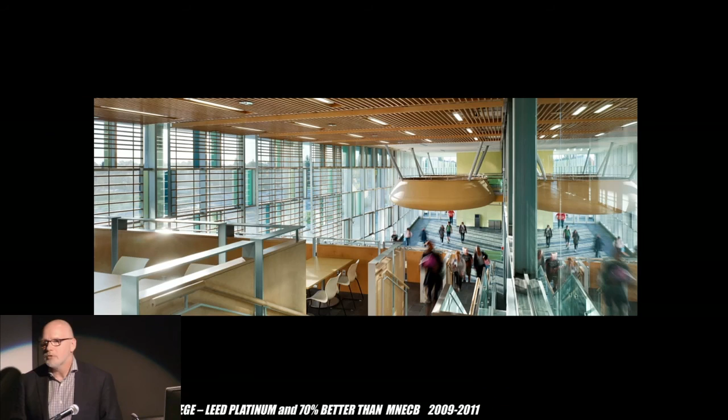In order to do that, it was built like a factory. Those are insulated metal sandwich panels on the exterior. On the interior, it's a dramatic student environment with about 10% of the total area, so 20,000 square feet of space made explicitly for shared learning. There are the sandwich panels and the solar shades—24 months from start to finish.

In this project, I had to believe that we could construct 40,000 square feet on top of an existing building—I'll show you more about this one in a few minutes—in 4 months, and innovate with timber construction in order to do so, and get these kinds of spaces on the interior when it was all done.

We'd never done a net zero building before. In this building, we had to believe that working with a construction manager and a very strong-minded client, we could achieve net zero on a very meager budget, and celebrate timber and student life, and places of repose for social learning in the building, and go through the iterations it takes to get to a net zero building. I'm definitely going to talk about that.

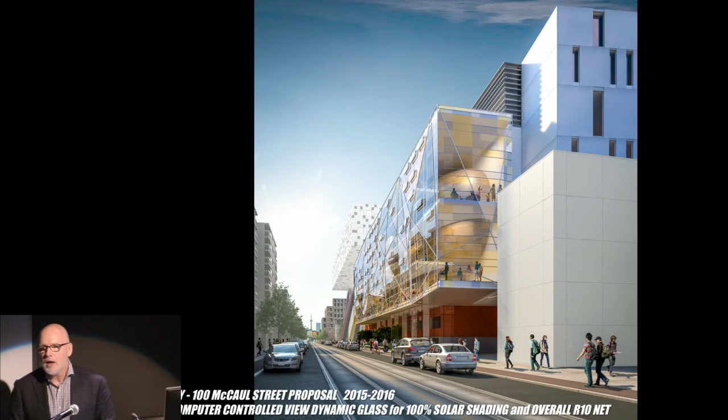In this building, we had to believe we could insulate every other piece of it—this is McCaul Street in downtown Toronto—so well that we could provide a great display for student life inside OCAD University and still be a net zero building. Okay.

Colleges and universities are constantly under pressure to innovate. As you know, the demographics across Canada at colleges and universities are changing rapidly, enrollments are changing rapidly, and the needs of students are evolving. What I've discovered, having worked both in the commercial and institutional sectors, is that they're committed to meaningful innovation.

They believe in design, and when a building's designed well, they know it—they can see it because they get more applications and have longer retention of their staff and students. They believe in design; it's quite remarkable. They also know that when student life is better, student outcomes are better. Very interesting that they fully believe that. Having worked in many colleges across Canada, I can tell you unconditionally that's the case.

So I want you to park that introduction for a second. And this is where my naive idealism comes in. I'm hoping that by the end of this you'll have memorized these 6 numbers and 1 letter, because I think this is going to be the shortest form of zoning bylaw for mid-rise that you will ever see. These are the 6 numbers, that's it. We're going to dispose of all the other paper you could possibly need—this is it. So we're going to save many trees.

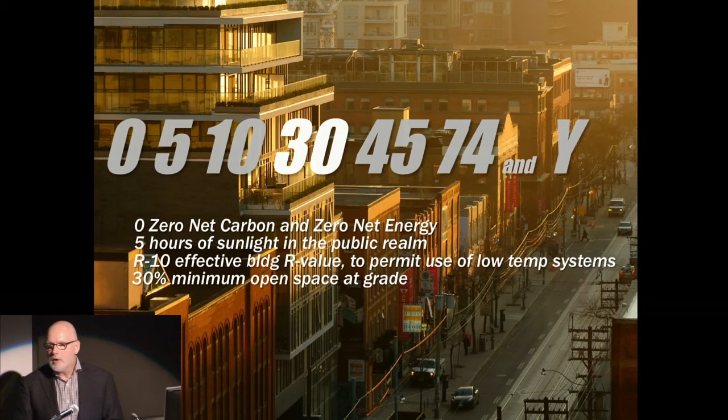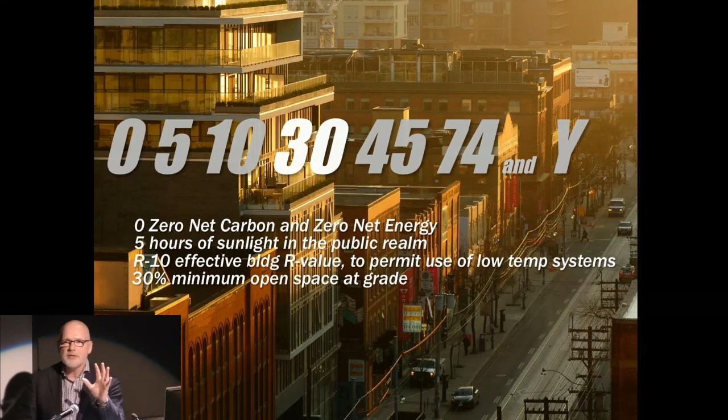30% minimum open space at grade. This is a pretty soft one, but that's because in most of the hyperdensity projects, there's very little—it never gets to 30%. What about setting a third of the site aside for open space at grade?

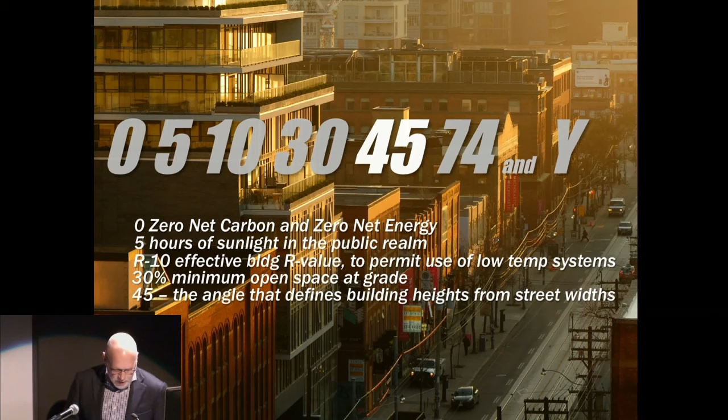45. If you've read the avenues and mid-rise guidelines, that is a number which seems like it's just something off your set square, an arbitrary number—45 degrees. But really, it's not an arbitrary geometric number. It's not an abstraction, but it's actually a latitude-specific sun angle that defines the relationship that your building will have to the public realm, to the street, and to your neighbors. It's not just a number.

And then 74. 74 is the energy use intensity of the building that I just described, which is a net 0 building. I don't know if anyone speaks energy use intensity—anyone bilingual? Nobody? Okay, well we'll get into that in a little bit. That's the energy consumption of a building. What it means is that it's a very efficient building.

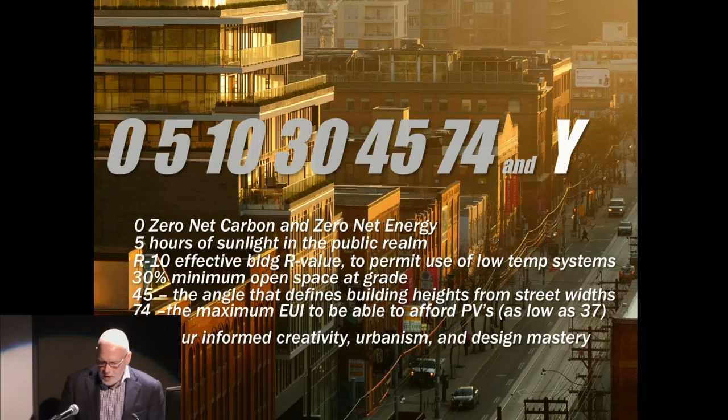And lastly, but not least importantly, when you know how to achieve the city livability we were talking about earlier, and you add these criteria, they're not going to replace all the things that were so eloquently discussed this morning. But when you add these criteria as self-evident underpinnings of your work, then you'll have informed creativity, and you will use your own sense of urbanism and the urbanism you're learning as you make your way through cities here and around the world, along with your design mastery, and you'll make your buildings better.

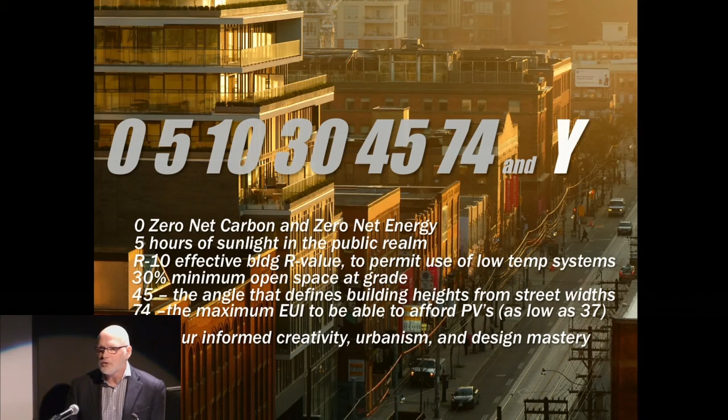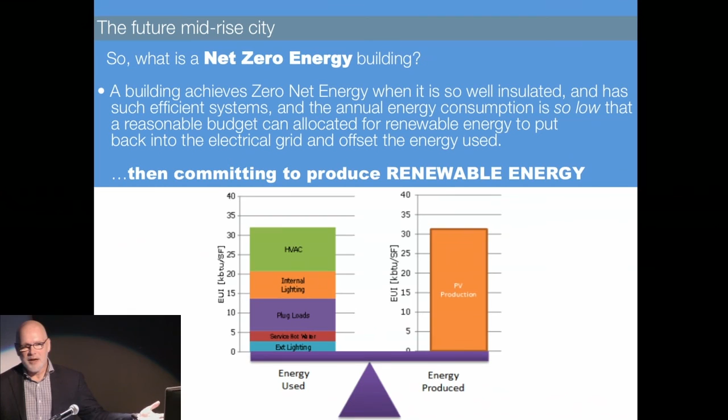Let's talk about zero for a second. What is a net zero energy, or zero net energy building? It's a building where you've made it so efficient that it consumes so little energy that you can, at a certain point, afford to buy enough PV to balance that energy. So you've got very little consumption, you create energy, and you put the two together—the building is a net zero building.

There's another way of looking at it: energy use intensity. Energy use intensity is the energy use of your building in kilowatt hours per square meter per year. You've probably learned about that.

And getting it low is going to be all of our targets, because we all need to be net zero by the year 2030, given provincial and federal aspirations, soon to be guidelines. Let's go about 5.

The Mid-Rise and Avenues guidelines suggest a minimum of 5 hours of sunlight in the public realm per day between the equinoxes. If you get 7 hours, you can have a typical lawn and a wonderful park. Between 4 and 7 hours, you start having to deal with shade-tolerant plants. Under 4 hours, the plants won't survive, or they'll need a lot of help — very limited planting.

So that's just one aspect of why it's important to have that 5 hours of daylight. I'm sure you've seen the plugins for SketchUp, and maybe Revit as well, for this transition from shadow mapping to daylight mapping. What an interesting change, to think about not the shadows, not the negative, but the positive — that the sunlight is the important thing. It's such a significant issue that it's in the Mid-Rise and Avenues guidelines: at least 5 hours of sunlight from spring through fall.

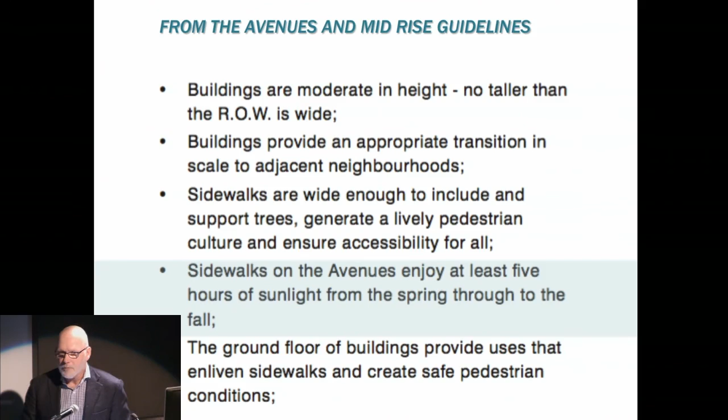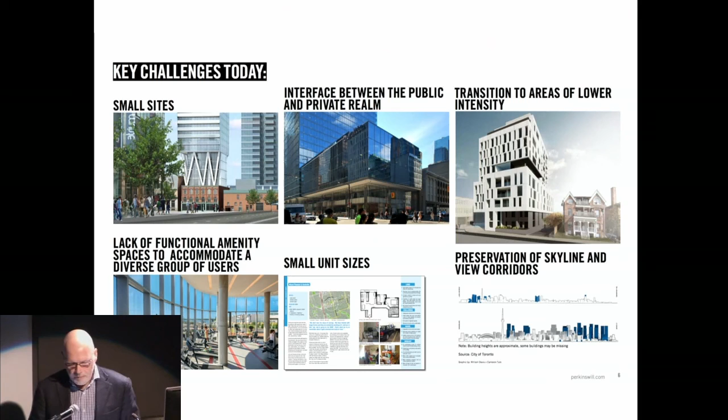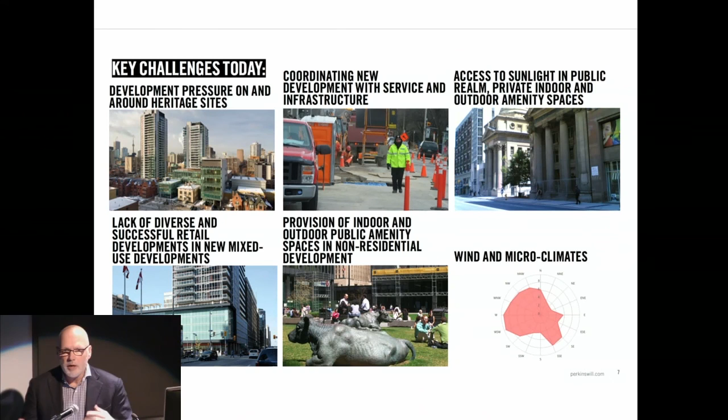But you're probably also aware of the TO Core Building for Livability study, done by Perkins and Will, which goes through a lot of issues of livability — key challenges in the hyper-growth city, with small sites, view corridors, and areas of transition. Other challenges being wind and microclimate. These are all things you've talked about, and we've heard in the discussions today.

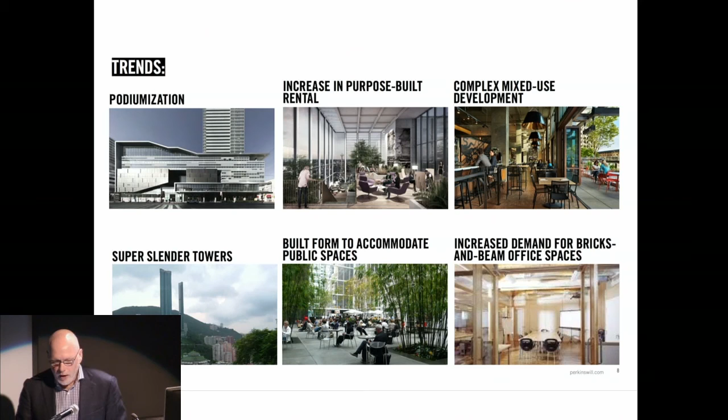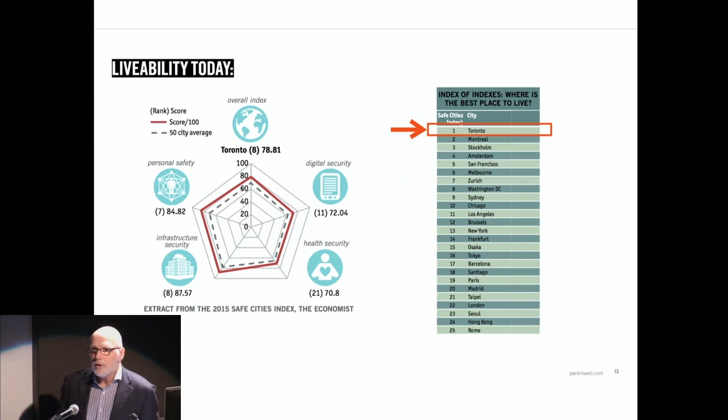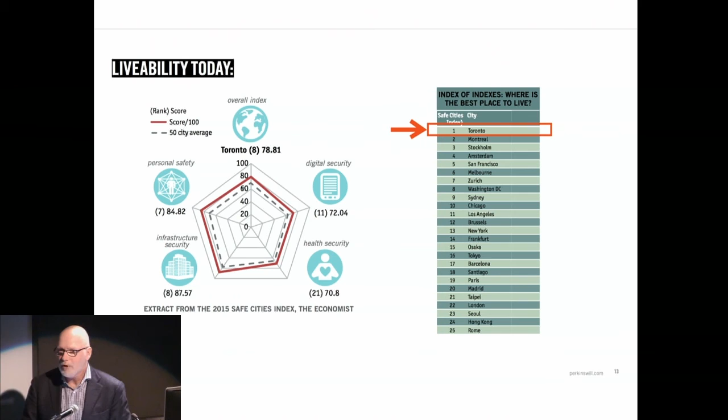Podiumization and all sorts of different trends infiltrating the high-rise buildings. Recognizing that Toronto is a very livable place, but it doesn't score top in any category — it only scores top in the aggregate of all categories. This led the city to say, well, we've got to get ahead of this, because as the city gains 100,000 or 200,000 more people, these categories are going to become under stress.

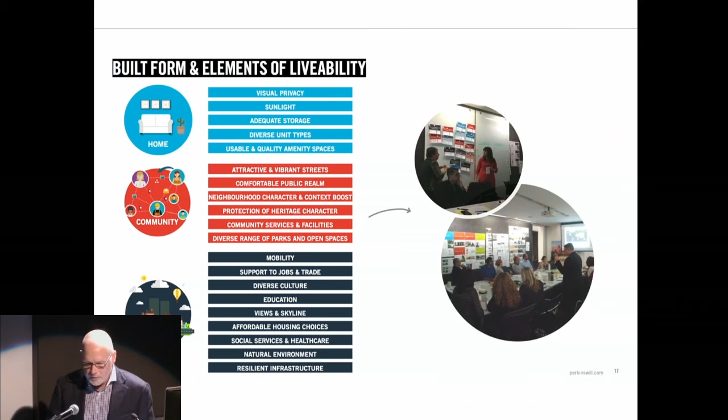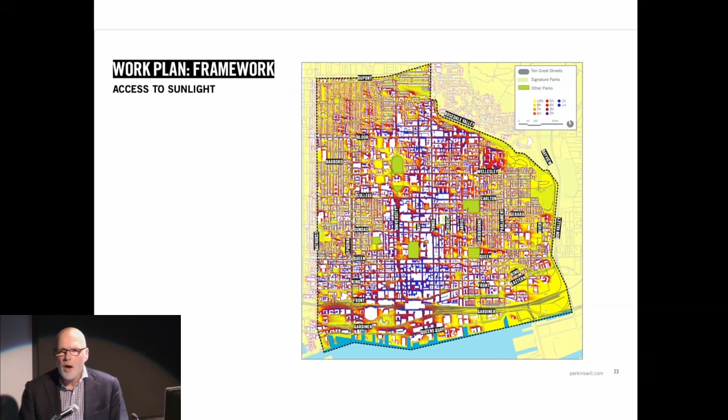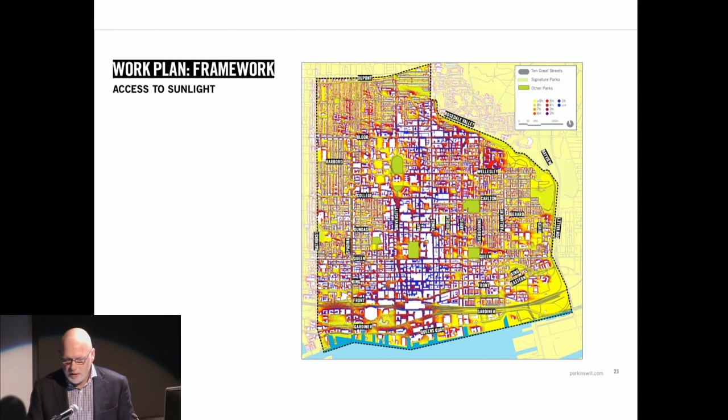So I'm going to pause there and say it could be easy for any of us to look at this and say, well, there's nothing I can do, it's just a fact of the intensifying city. But I think if you look around the world, you'll see that architects actually believe they can take these livability criteria into account and use them to shape their buildings — to provide access to places through building shape, access to daylight through building shape, that you might not otherwise be able to do.

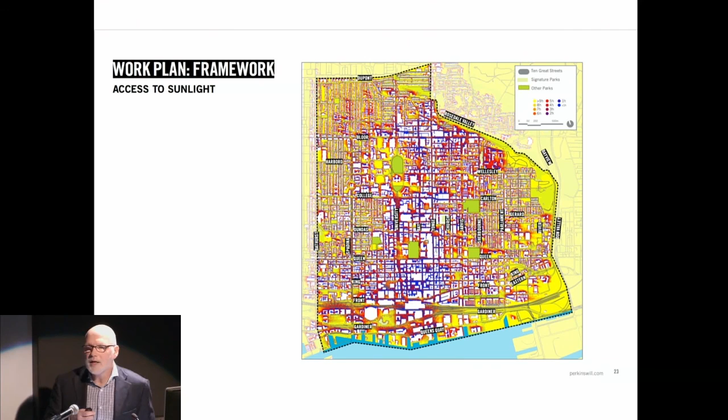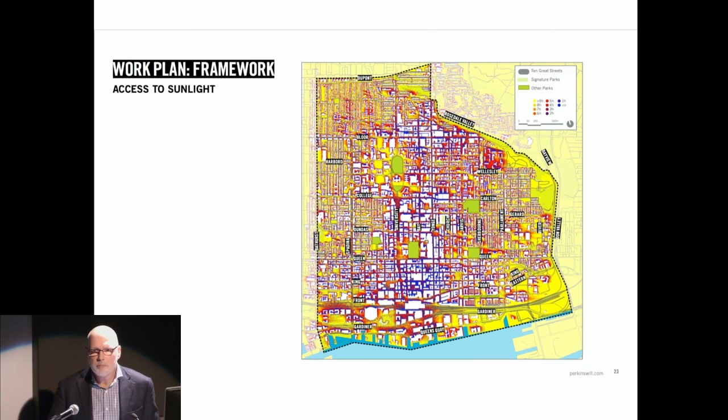So when I put forth these criteria, these possible design criteria, I guess what I'm saying is it's possible to actually try and use them to shape your building, to shape your space, to orient your courtyards, to orient your buildings, by understanding how these phenomena are actually acting on your site.

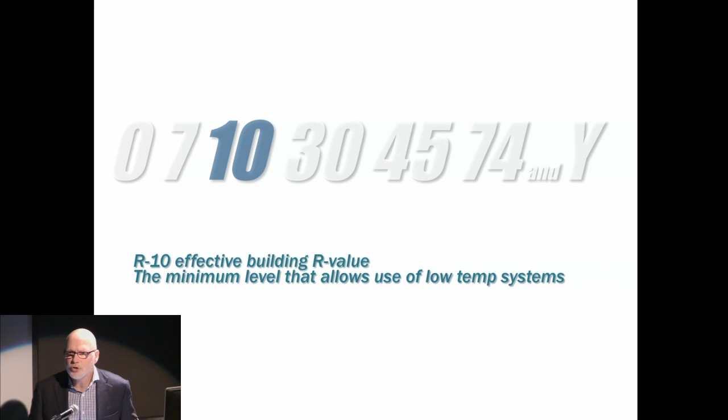I work a lot with, and have lectured a lot with, Steve Kemp — a very interesting guy, a scientist, an energy model reviewer. I think he's been reviewing energy models for LEED for about 10 years now, a long time.

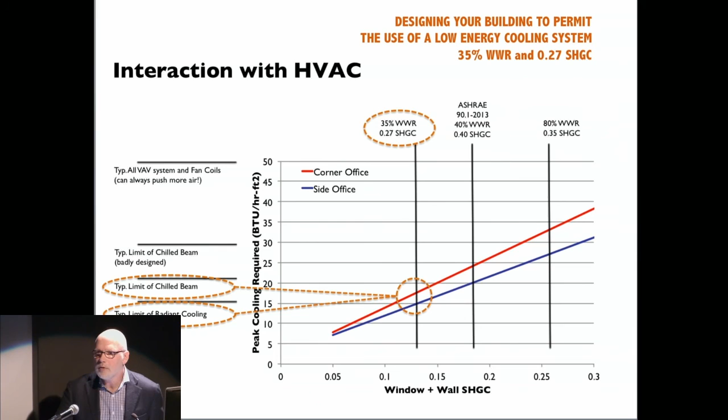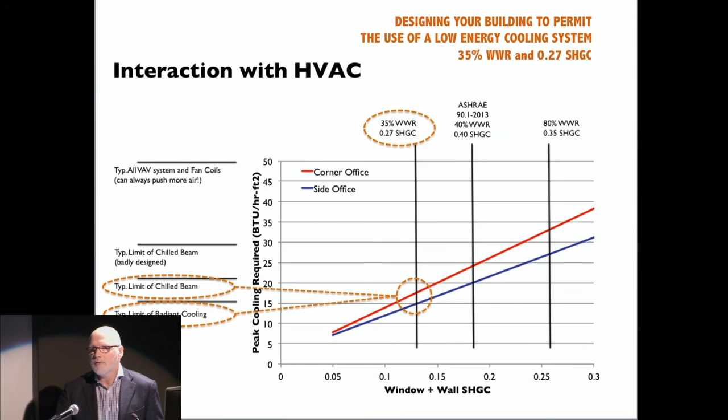And it's his opinion, having seen all these energy models, that you cannot achieve a net zero building unless you're using a low temperature energy system — chilled beams or radiant floors. Can't get there otherwise. So he said, if those are the only kinds of buildings that will achieve net zero, what do architects need to do to make sure that's possible? From the cooling point of view, the sun access point of view, he said we need a maximum of 35% window-to-wall ratio. And he's also positing, either with solar shades or with glass quality, a 0.27 solar heat gain coefficient. I don't know if you've gotten into that, but I can assure you that in your very first project, outside of school and in the office, you'll see all these numbers come at you.

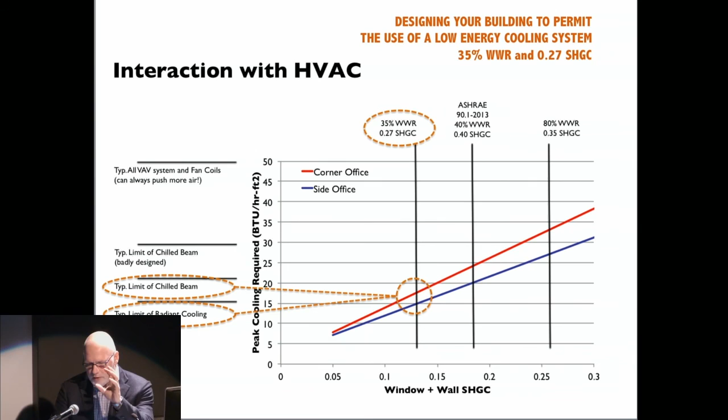Well, that's that criteria. But at least as importantly is the R value of the building. Same thing, the limit of radiant cooling, or in this case, VRF pumps. He's saying the building has to have an overall building R value of R10.

Now you could think, well, the code says R20 walls, R30 roof, and R4 glass. Well, those are the nominal R values. The effective R value is when you degrade all those by thermal bridging, and that usually is by half, or maybe even a third. So what does it really mean? It means lots of insulation and really good glass, like R8 glass.

So think about that. We're only 13 years away from a net zero architecture world, and these things are not being discussed very much by anyone. As I think I showed you in those first four projects, they don't limit design. They're just not talked about.

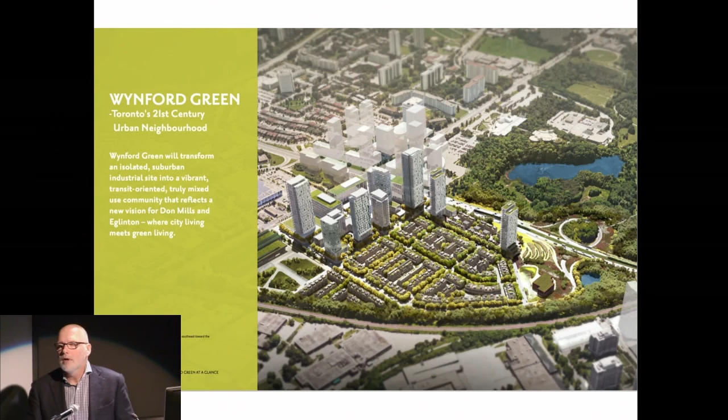They did a beautiful job on Wynford Green with this extraordinary mapping of a site near Don Mills and Eglinton Avenue, where they made a public space network which blurred the boundaries between their site and the Don Valley, and between their site and adjacent greenways, putting that in the foreground. First, we're making a public space network, and then we're developing the planning in between. I thought that was a beautiful and very strong thing to do, especially when you're developing such an enormous site as this one, at the corner of Eglinton and Don Mills.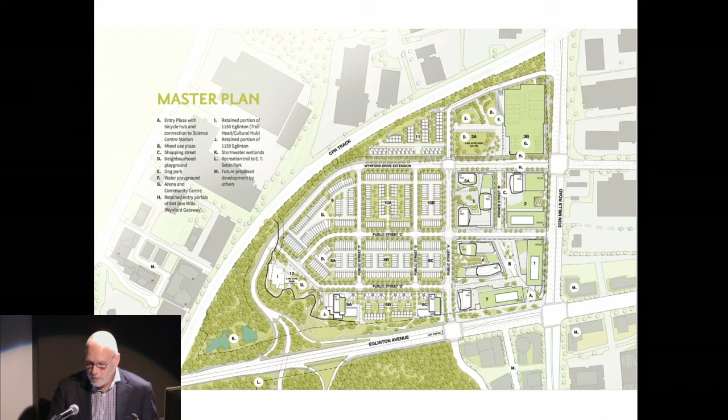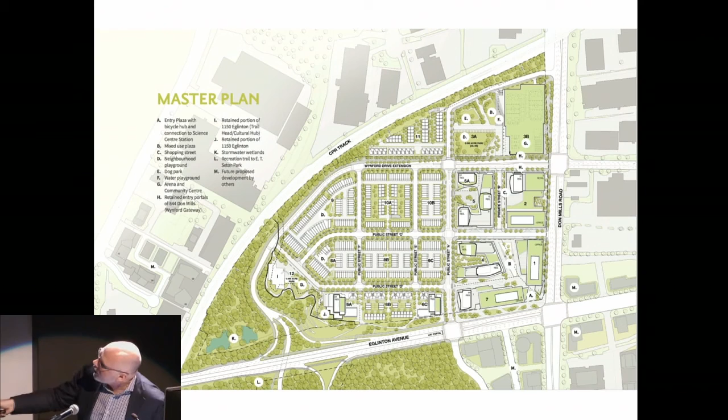There's the actual plan of the site, and density in this site. So you can see there's CPR track up there. This wonderful green against the CPR track, and the way in which public space is oriented and green space is organized around it.

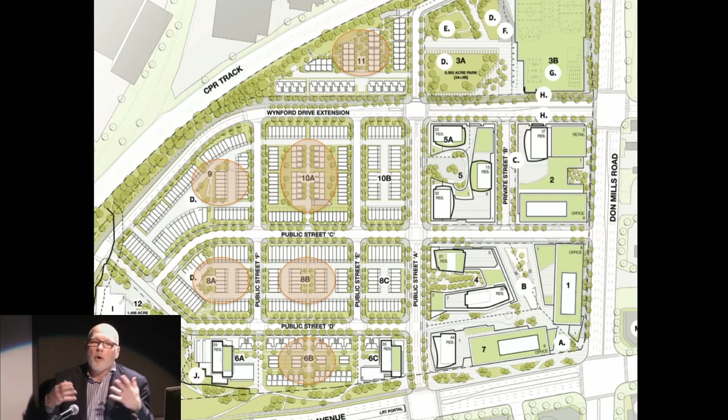We commented about it when we reviewed it at Design Review, but it reminded me of Regent Park. Regent Park, much like Alexandra Park, was one where innovative ideas about continuous green spaces were introduced, in this case in 1952, and it took almost 60 years to find a plan to get all those buildings back on streets again.

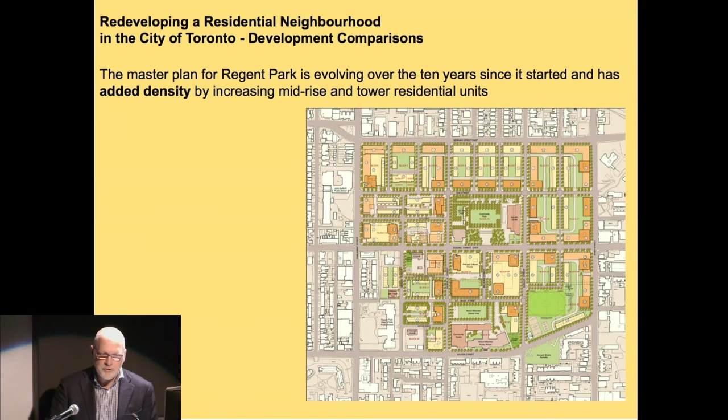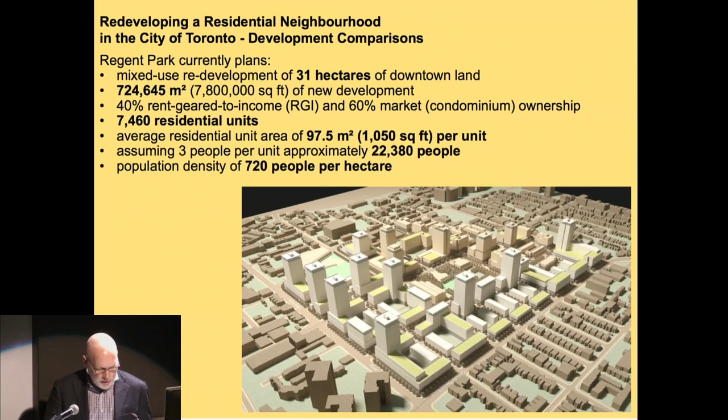There were things that made a lot of sense to architects designing in 1952, part of CIAM and the modern movement, which might have been truer in other parts of the world, but they weren't as true here in Toronto. We're discovering that the street is the common planning element we need to support as part of our public realm.

I don't think I've ever seen more groaning about a requirement in the mid-rise and avenues guidelines than the number 45 and the 45-degree angular planes. I can't tell you how many projects I've seen—remember, I've seen about 400—where someone says, yeah, this is the angular plane, and I just popped through it a little bit. It's like, what's the big deal, it's just a little bit. And you could say, well, if it's just a number and it's just 45...

But as I mentioned at the outset, 45 is not just an arbitrary number. It's meant to describe the relationship you have to sunlight access in the public realm, sunlight access to the vegetable gardens of your neighbors behind you, and sunlight access into the laneways. I guess it's been trampled by so many projects that it doesn't seem to have relevance, but it'll have a lot of relevance on your site because you're at a mid-rise level and you can actually map these things out. You can see how light will play and influence the use of outdoor space and the public realm.

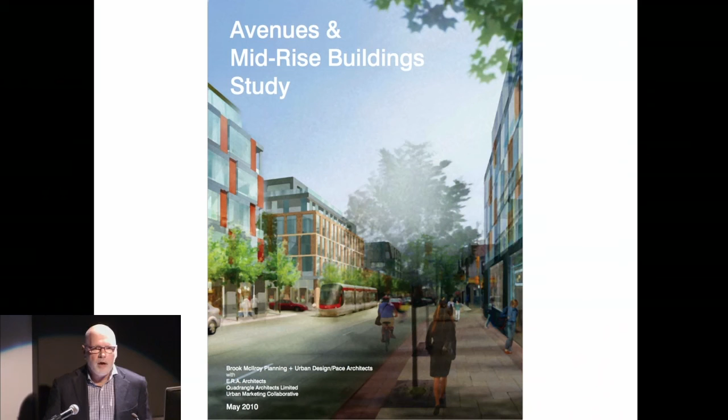daylight access to the public realm, while discussed, wasn't as important as the precedent of another building down the street, which was of similar height, so there should have been access to that same height by this developer. It's funny that the issue of our realm, not the realm of development, but the public realm, didn't really have any currency in that argument.

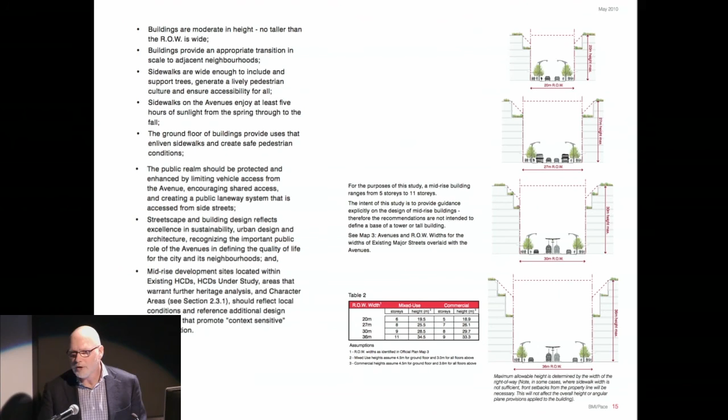So I ask you, as you make your way through your careers, as you are in your first or second or third work terms, as you go out, just think about the actual values underlying these abstract numbers. They mean something about making livability. And we talked earlier that that's what distinguishes Toronto, is livability.

Again, a diagram which is much maligned, right? Oh, look at the architecture that comes from this diagram. Well, that's not the diagram's problem, right? That's us, we're architects. You can make something beautiful with insulated metal panels. You can make something beautiful with anything. So let's understand what these relationships are about, and let's go. Let's have some fun.

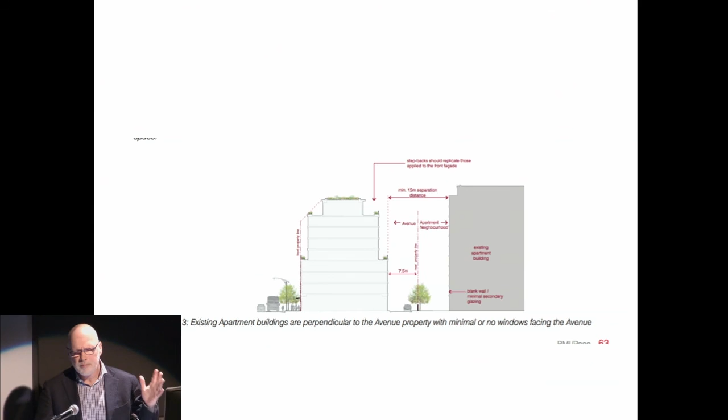And further to that, you may have some situations where you're dealing with existing buildings, high-rise existing buildings, laneways, and all those mid-rise and avenues guidelines, which when you look at them, they're a bit tiring in that manual. Understand them as the way that livability is made in Toronto.

So here's a little primer on EUI. This is the amount of energy the building uses in a code conforming building. That's the size of the building, and that's its number. You just divide that by that. In the building that we're going to see in just a minute, it consumed that much. That was the area. So its energy use per square meter per year was 74.

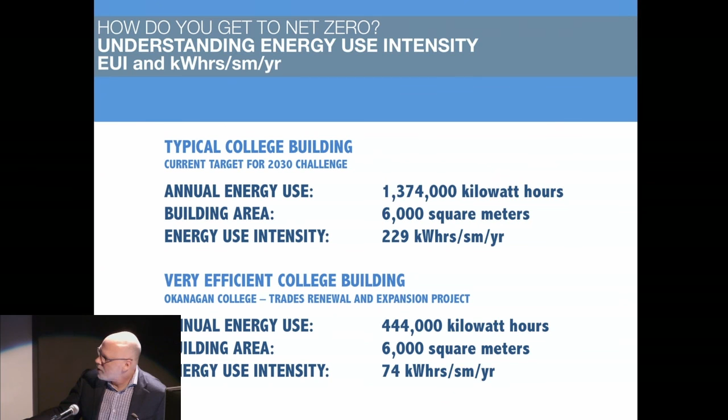You're going to see that number in Toronto Green Standard version 3 a lot, because that's going to be a criteria for your building performance. It's not going to be LEED, there's going to be a building envelope criteria, but there's also going to be an energy criteria. It's easy to apply, well, it's not easy to get to, but it's easier than other metrics to understand how the building is performing.

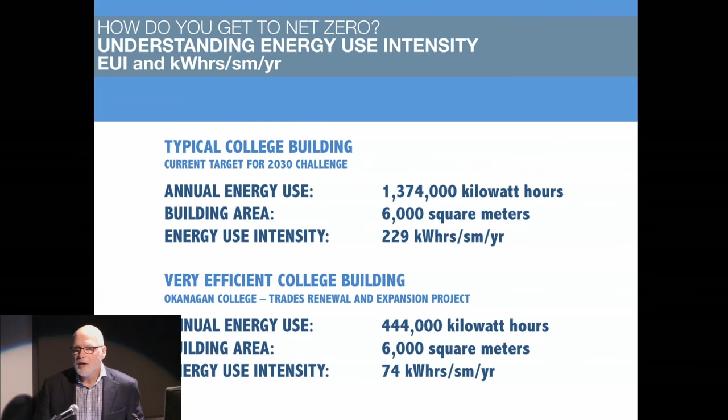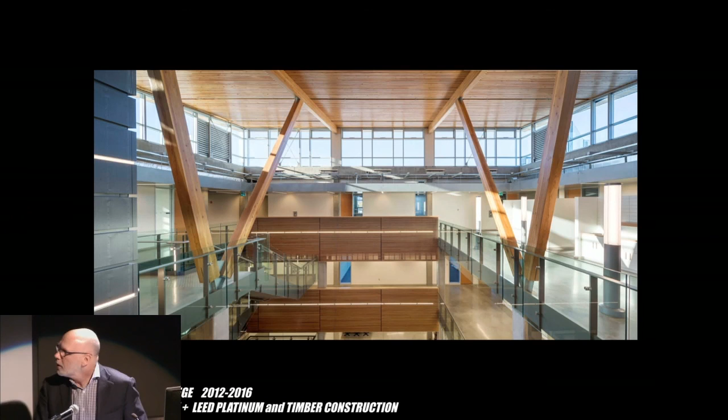And this is that building. So it's filled with light. There are lights on, but it's filled with light. It's a great student space. It is, and as I said, it's also made of timber.

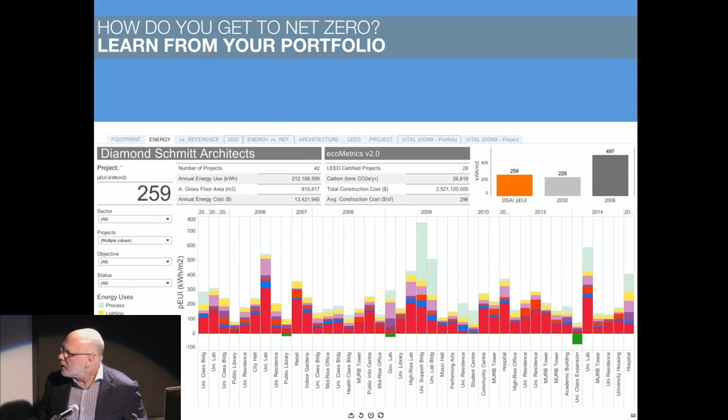We, as an office, Diamond Schmitt, we track all of our buildings through this tool that we have. We get the energy model data from the energy modelers. We put it into this software. It takes a little bit of time, and out it comes. And each one of these buildings has many, many pages of data that we can extract from it, so we can see. And here we are.

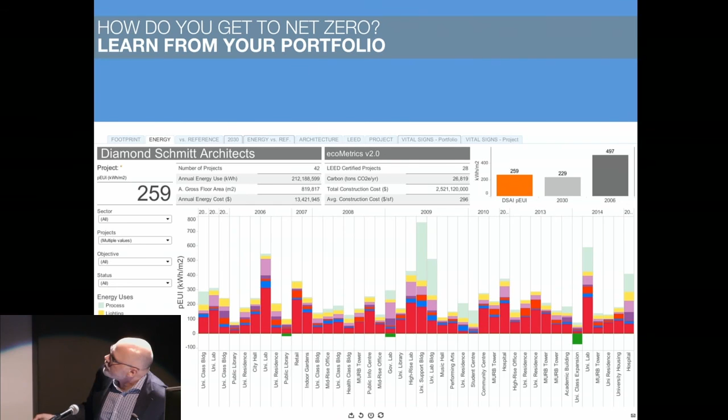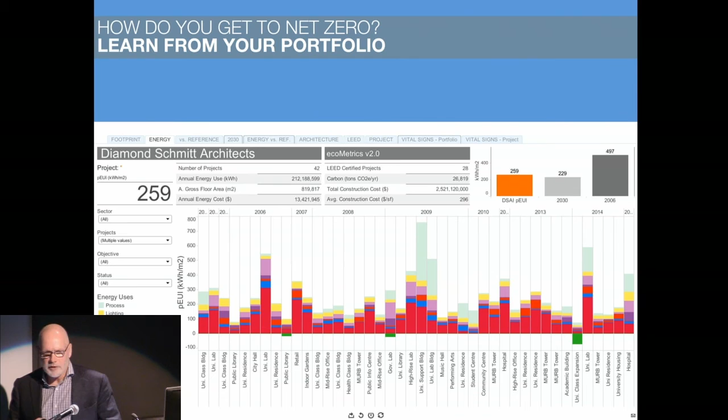We've been doing it for about 12 years now, and there's no trend in this. When you look at our overall portfolio, there's no trend. So when we look at that, we get very nervous. That's bad. But if we look at owner-occupied buildings, as opposed to rental buildings, there's definitely a trend. You could put that line through there. It's not a steep enough slope for the scientists in the room.

It's not a steep enough slope, but this is that building I'm telling you about, the Okanagan College building. It gets down to 74, and we make 74 kilowatt hours per year of energy, and it's called net zero. In other words, the owner at the end of the year has a zero energy bill, no energy bill. And there it is again.

Each region—Ontario, Quebec, BC, Alberta—has a different energy climate, energy purchase climate, as well as climate. So there's no simple formula. I mean, I tried to put it down as 16 commandments. There's inflation even on religion.

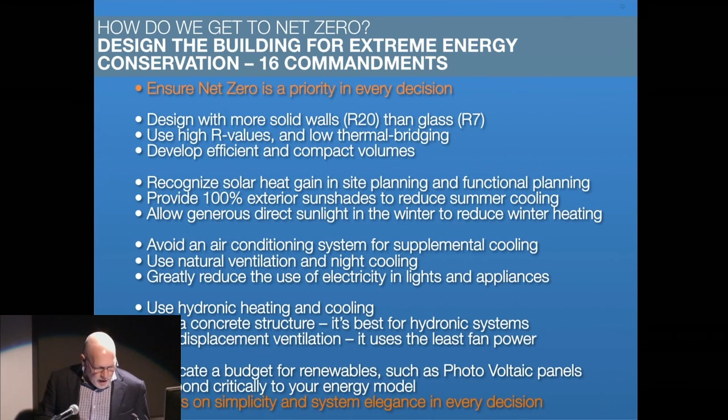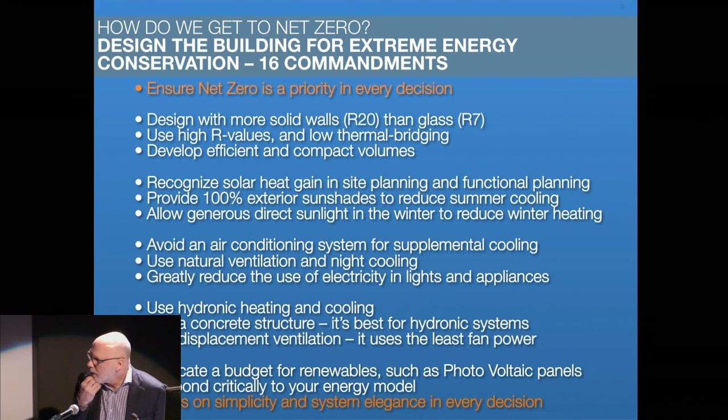I could spend time on each point, but having been through the process a couple of times, the orange lines are the key ones. You've got to focus on it. And the bottom one is, the minute things start getting complicated, you're headed in the wrong direction. It's got to be really, really simple.

The other orange lines here that are surprising is that once you get a really good envelope and really good glass, we had a situation where we discovered that this building in the winter was using more energy. Well, I'll pause on that one for a second.

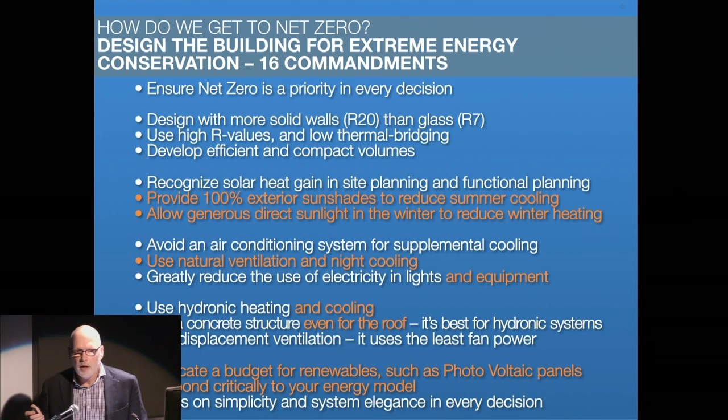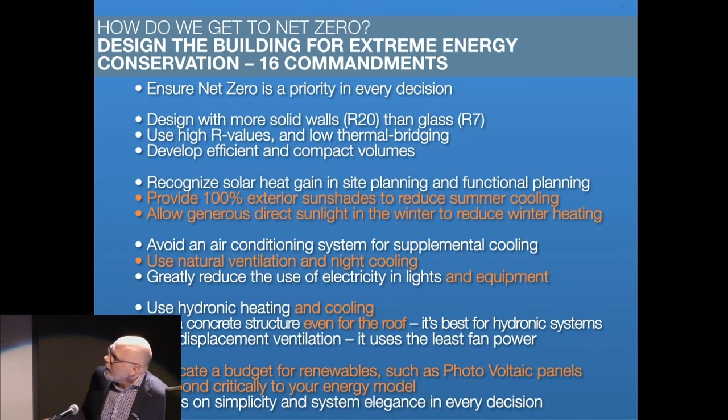You need to provide 100% exterior sunshades during the summer, 100%. That can either be through sunshades, through dynamic glass, or through dense glass—100%. Why is that? Because if you've got this very simple mechanical system, if you get any direct rays of sun into your building, the mechanical system can't handle it, which makes balconies very good, by the way. Natural ventilation, good equipment.

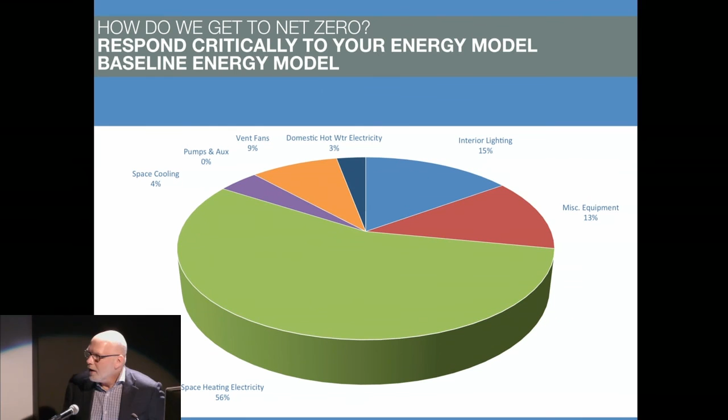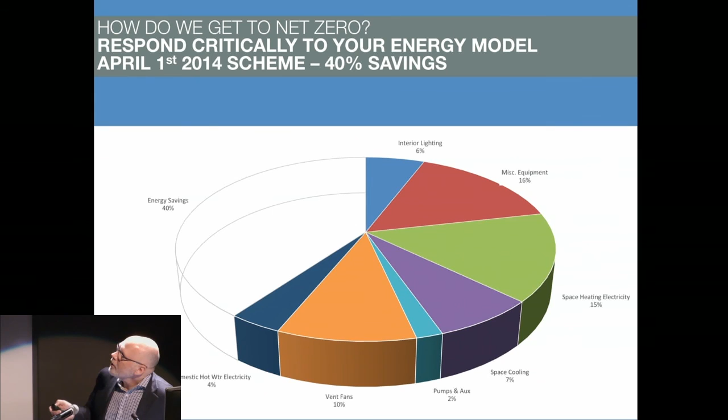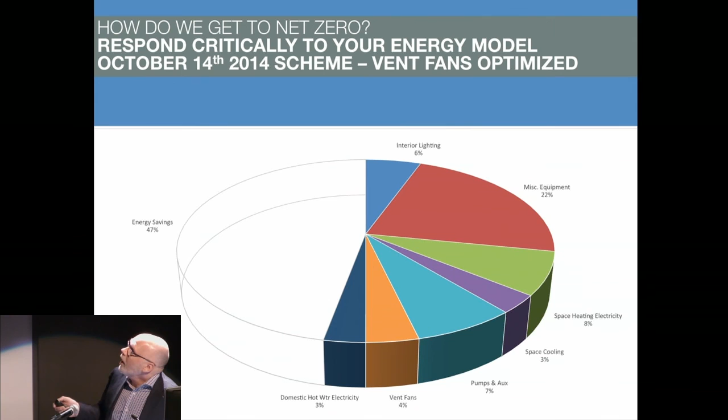It's an iterative process. So we spent about a year going through model iterations before we could come up with those 16 commandments. This is the code-conforming building, just using simple systems, good insulation, reasonable glass. Then we went back and forth testing miscellaneous equipment loads, optimized window areas—optimized meaning much less glass, and making sure it was in the right areas—and looking at mechanical equipment to see if we could use fewer fans.

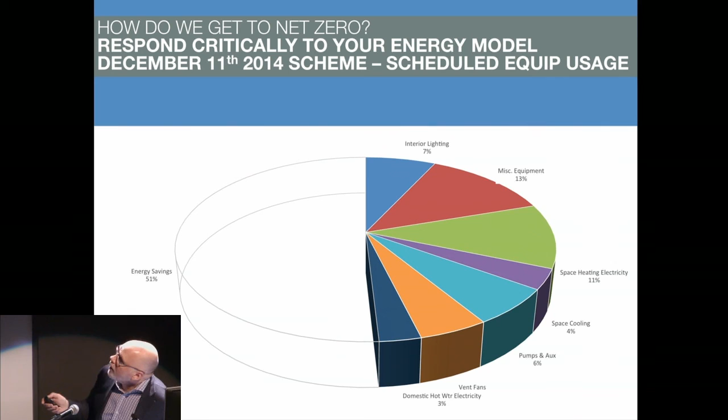Then we went out for tender and we were still not right. And then we learned that we could schedule some of the equipment because it's not a factory, it was a school. We went through all that detail, and the next thing you know, there we were—bingo, 74. And that's that building.

I would say these things here—when anyone ever asks me, how do I get to net zero, what do I need to do as a starting point—less glass than wall, really really good shading, an excellent overall building R value, and it's essential that you use a low temperature heat source.

So extremely low energy consumption doesn't mean you can't have fun if you know what you're doing. This is a project on McCaul Street, just down the street from LGA—no, sorry, Bortolotto Architects, right, a little further down the street.

Every other part of this addition, which was about 16 drawing studios and painting studios, was heavily insulated except for this piece. This piece, built in a little sliver of land 6 meters wide and about 70 meters long, was meant to be the student study areas facing McCaul Street. But it's all glass—what's he talking about? Is he really going to stand behind his ideas? So what we did was we designed the glass to be R8.

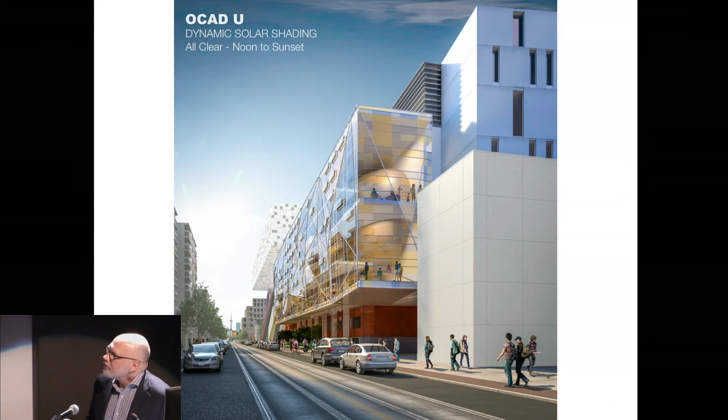So there you go, I'll just show it a little bit faster. All to say that we talked to the mechanical engineer and he said, if you've got the good glass and you've got the good solar shading, yes, you can do this. So the target was net zero for this project.

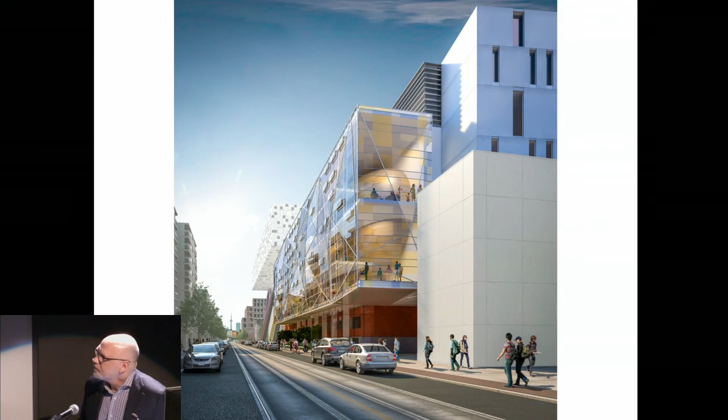Inevitably, when you're working on a project, you want to make sure there's some dramatic moment in it. Sometimes it comes from you, sometimes from the needs of the project. This is the project where we had to find a construction technique to build a law school—about 40,000 square feet of enclosure in 4 months, because that's the only period the school was closed down, from May until September.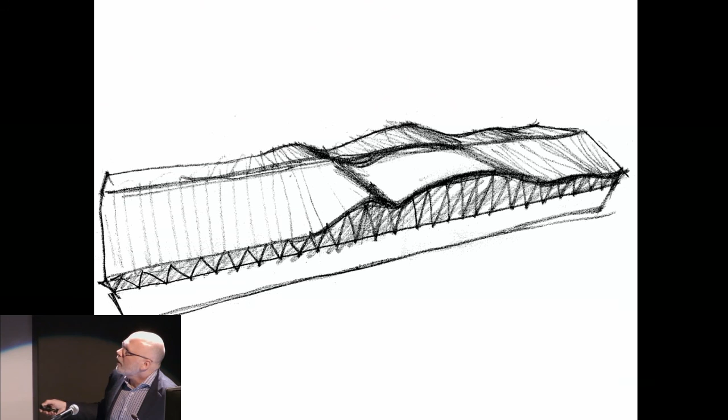So we were working with a team, Matthew Choi, Bolton Chan, Don Schmitt. We were sketching, and we thought maybe we can find a way to get a lobby, a form that goes over this giant mechanical room, and a moot court underneath this big roof. And that sketch literally turned into that. That's the lobby, that's the mechanical room, and just off to the right is the moot court.

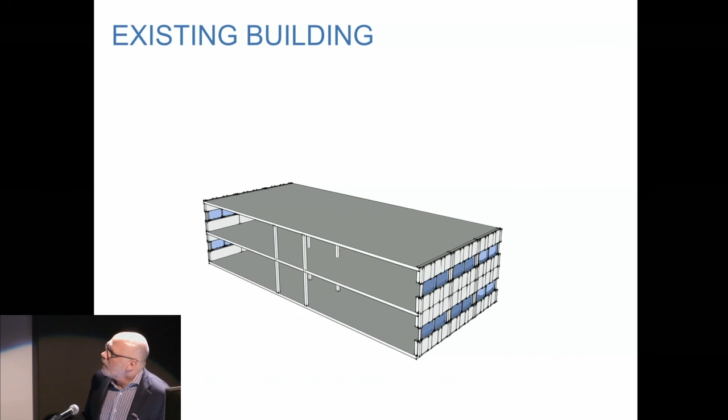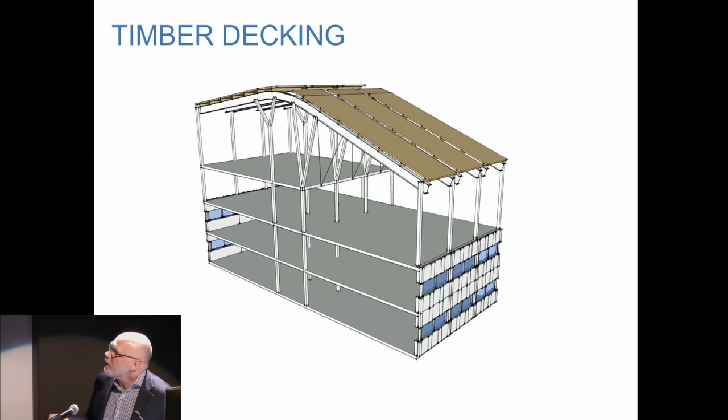In order to get it to work and for us to understand what the design possibilities were, Matthew, one of the team members, built every single piece of the skin many times in order to understand how the pieces were going to come together, how it was going to be dropped in place. And this is what we got.

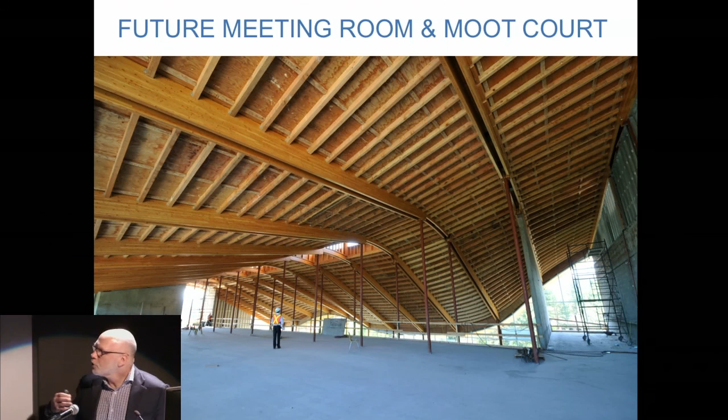Actually, this was the most dramatic moment before all the partitions came in, was this fantastic shell on the inside. And that's all 12 foot wide, or 3.6 meters by 12 meter long panels, fabricated in Delta, BC, put on a truck, sent here.

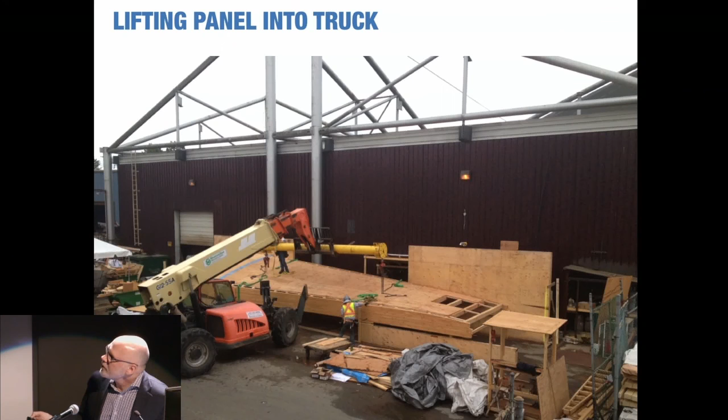And so that's their fabrication. All the individual pieces, that's still in their factory. That's them arriving on site. Looks like a skateboard park. There they are on the parking lot, being lifted into place.

This key detail. First of all, these are 6 meter high, 125 millimeter diameter columns. Think about that for a second. Popsicles, no, straws in your physical model. And that saddle connection on one side is one prefabricated piece, and on the other side is the other prefabricated piece. So you can say, well, why is he showing me this level of detail?

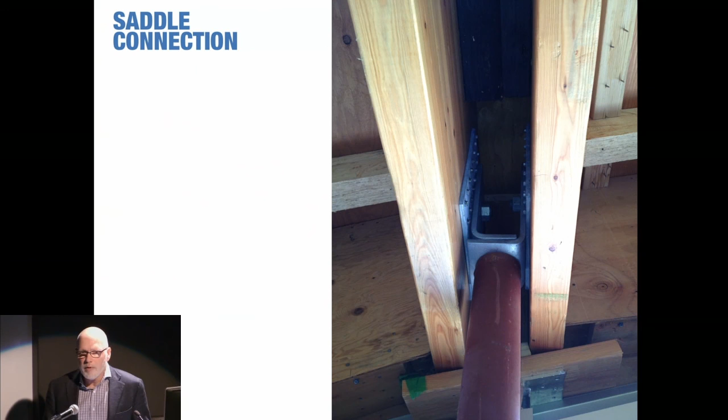I'm showing it to you because if there's a moment in your building that you really love, that is a gesture, that requires you to understand craft and the sequence of construction, it's an opportunity for you to really get into it, to really dig in and understand it. Get into it empathetically. Think about how it can be built. Could you build it? And how would that happen? And so those are those straws. Right? Look at that.

I remember asking—actually my favorite story is that when these were being drawn by one of the architects on the team, he was drawing 125 millimeter columns, and the earlier version of these, which are timber now, were actually 250 millimeter deep steel beams. And I said, Matthew, come on, 250 millimeter steel beams for a 12 meter span? And 125 millimeter columns, really? He said, you better talk to the engineer, that's what he told me to draw. And sure enough, not only was he right, but that's how it was built.

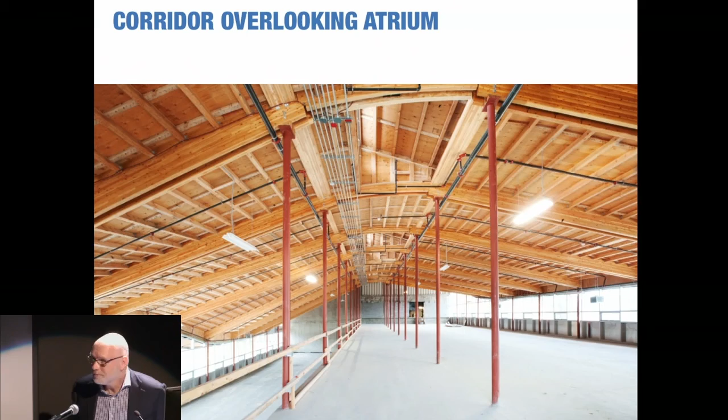And that's the space. We just reclad the bottom part and emphasized the entrance. We weren't able to change the windows.

The last thing I want to talk about is thinking big. And to—I'm trying to remember her name—the bicycle factory this morning, Sonia? There you are. Great that you were thinking big.

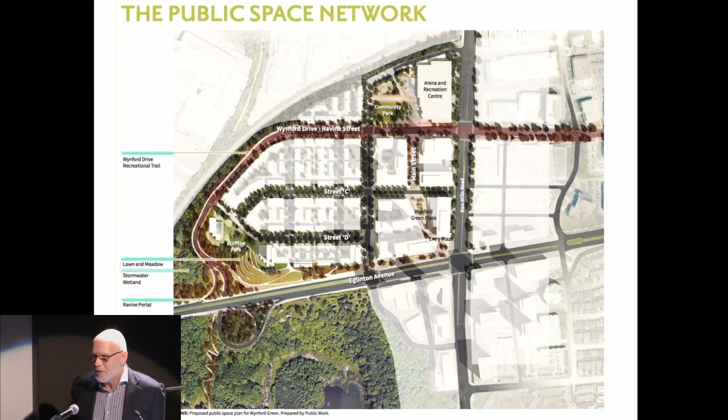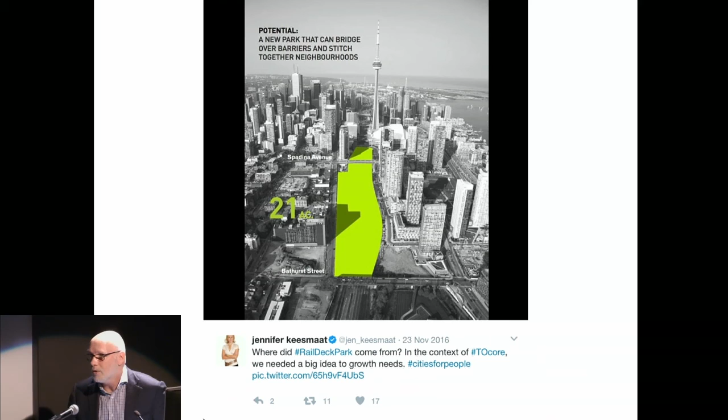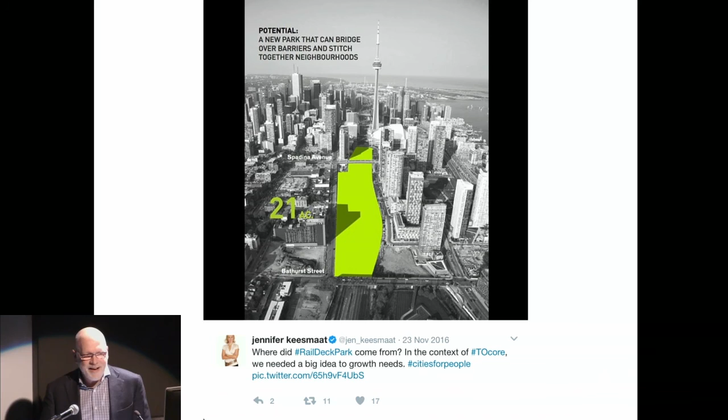Don't be worried about thinking big, because about 10 years ago, if someone had said maybe Toronto could put a park over the railway lands, someone would have thought they were crazy. And density, growth, and public life, and popular opinion, and the fact that people are living downtown now—you all saw it in the newspaper. It's got a long way to go, but there are a lot of people who really want this to happen, and some pieces of it are actually already being considered in the eastern part of the railway. So something that would have been, if it had been in your thesis, everyone would have smiled politely and said, yes, that's really nice, nice to dream big. And yet here it is as part of a potential future of our own city of Toronto.

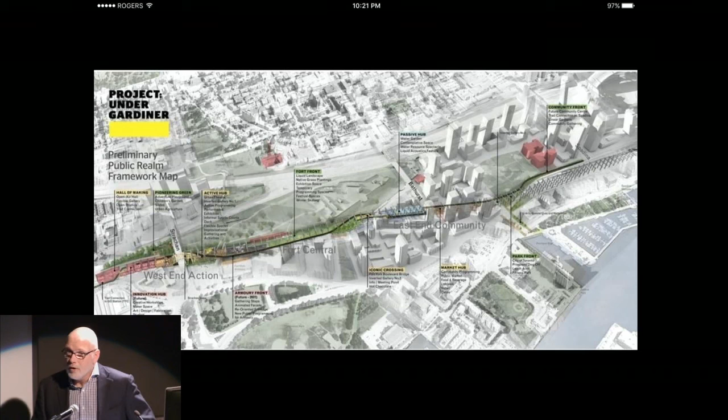And then similarly, another great project by Public Work, the Under Gardiner project. Again, 20 years ago, talking about the Gardiner was like talking about a sewer, about an industrial backwater, about something that could never, ever be properly appreciated or occupied. And now there's great public enthusiasm and a private donor for a massive park. So thinking big is a good idea.